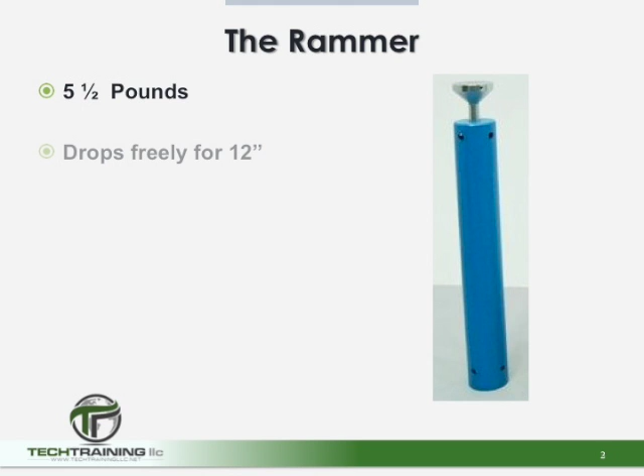Now, whether you're using the standard effort or the modified effort, you're going to need a rammer. In the standard effort D698, the rammer weighs 5.5 pounds. It drops freely for 12 inches, and it has a sleeve to guide the rammer to the soil. The rammer also has 4 vent holes at the top and 4 vent holes at the bottom, 8 vent holes in all.

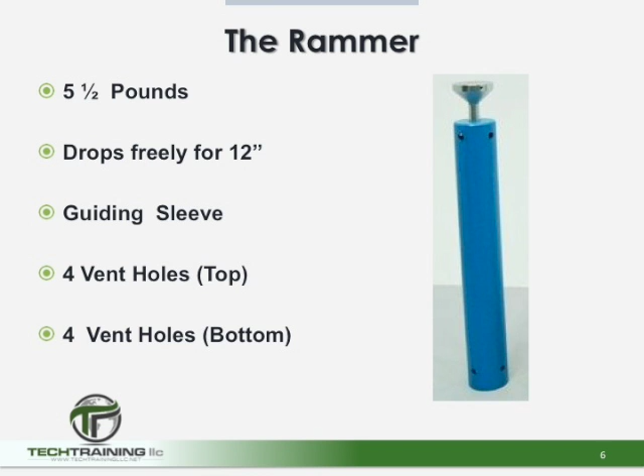Now, when determining the compaction characteristics of soil using the modified effort, we're still going to use a rammer, but here the rammer weighs 10 pounds and it drops freely for 18 inches. However, it does have a guide sleeve and 4 vent holes at the top and 4 vent holes at the bottom.

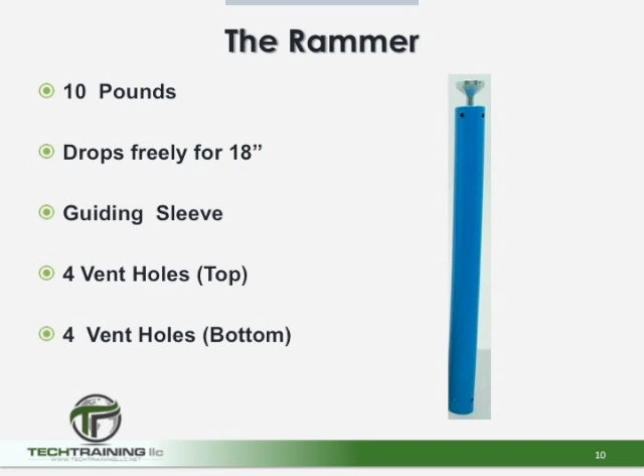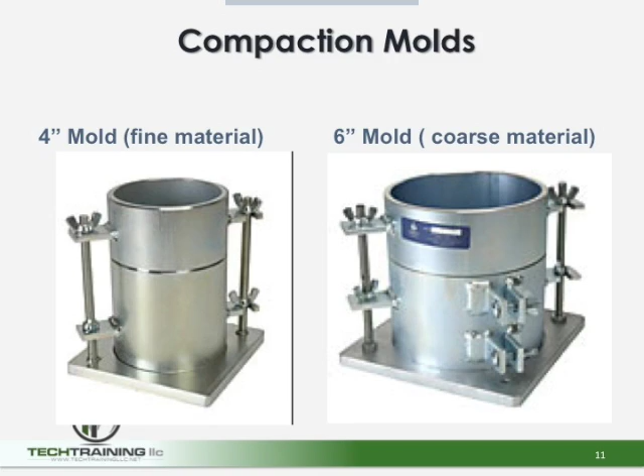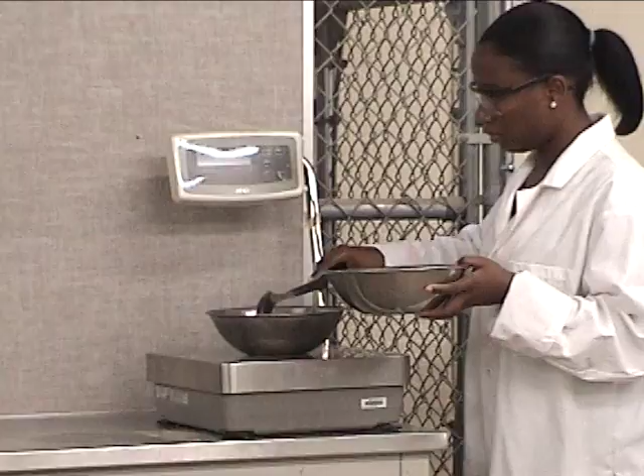We're also going to need a cylindrical mold, a 4-inch mold for finer material and a 6-inch mold for coarser material. We're also going to need an oven, a scale, and mixing tools. Now, there'll probably be other pieces of equipment that we need along the way, but for now, let's head into the lab and begin our tests.

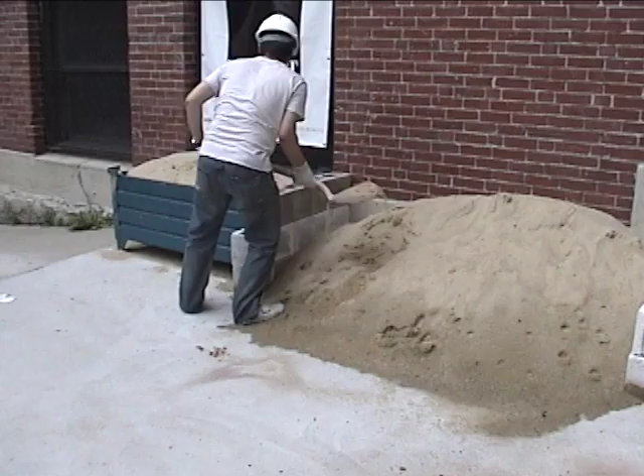In today's lab, we're going to be doing standard test method for compaction using the standard effort. What we'll do is we'll sieve our material through the 3/4 inch sieve to determine the amount of mass that we have on that sieve. We'll also sieve it through the 3/8 inch sieve, and then finally the number 4 sieve.

Now, if you're not familiar with the way sieve sizes work, above the number 4 we have solid numbers, 3/4, 3/8 inches. Once we get into the numbers, which is below the 3/8, we turn into number 4, 8, 16, and so on. All that means is the amount of openings per square inch.

Now, since today's soil has already been sieved through the number 4 sieve, what we're going to do is use the 4-inch mold. And again, this is the standard compaction test. Therefore, we're going to be using the 5.5-pound hammer, which is going to drop 12 inches.

Now, there are 3 different procedures within ASTM D698 that can be used. There's procedure A, which is used with a 4-inch mold. We do this procedure when the weight of the material retained on the number 4 sieve is less than 20% of the total sample weight. We'll use procedure B, which also requires a 4-inch mold, and this procedure is used when the weight of the material retained on the number 4 sieve is greater than 20% of the total sample weight.

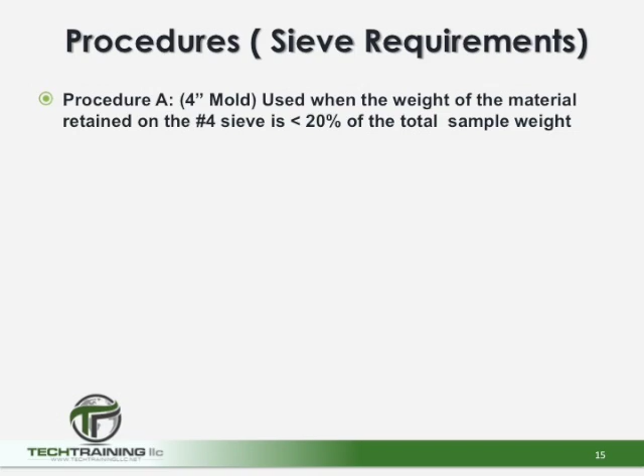So when we do this test, what we're trying to determine is the optimum density of our material. For example, if we were building a sandcastle on the beach, what we do is we add a little bit of moisture to that sand, and the sand begins to pack a little bit better. What's happening actually is that the sand is coming together better. Therefore, if we put sand into our mold here, that sand is going to take up a certain amount of space and it's going to have a certain weight.

So let's just say, for instance, that the first time that we fill up our mold and we compact it, we have 3.25 pounds of dry soil. In other words, what we're determining is we're going to eliminate the moisture from it and say the actual dry density is 3.25 pounds. Now, if we add a little bit of moisture to it, it's going to compact a little bit better.

In other words, more material can go into the mold. So what we're going to do is we're going to determine that dry density, and it's going to increase, let's say, to 3.75 pounds in the mold. Now we're going to add a little bit more moisture, and it's going to go up yet again. And let's just say that it goes up to 4 pounds, again, in the mold.

Okay? Now, all of a sudden, we add a little bit more moisture, and again, think about the sandcastle. What happens is it begins to fall apart. Why is that happening? Because now we're no longer getting optimum compaction, but we're actually replacing the soil with water. So now the weight begins to go down. So as we calculate that dry density, it goes up, up, up, and then eventually we put too much water in it and it goes over the top, and this is what's considered the other side of the optimum.

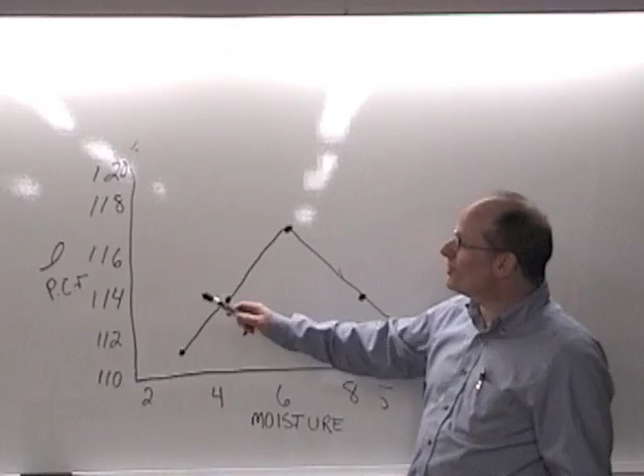So when we graph this, what we're going to do is we're going to graph the optimum density compared to the optimum moisture. And again, if we think about the sandcastle, what we're doing is we start off at, let's say, 3% moisture. And inside of our mold, we put in 110 pounds per cubic foot of material. Now I know that you're thinking, well, the mold is very small. The mold is exactly 1/30th of a cubic foot. So what we do is we take that weight and divide it by 1/30. Therefore, it'll give us the pounds per cubic foot of material in the mold.

So let's say we start off at 3%. We have about 111 pounds per cubic foot of material. We're going to add a little bit of moisture, and that comes up. The moisture goes up along with the density. Then we add a little bit more moisture, and what happens is our density goes up as well as the moisture. And then we're going to add a little bit more moisture, and when we do, we're going to notice that suddenly our dry density begins to drop off.

Once this occurs, we are over the optimum compaction limit. And we want to do it again just to make sure that we definitely have an accurate reading. And once we're beyond the optimum, we can make our determination that this is the optimum. Now, depending upon the application, what the actual control limit is may vary. In some cases, it may be 95% of optimum. In other cases, it may be 93% of optimum, and so on.

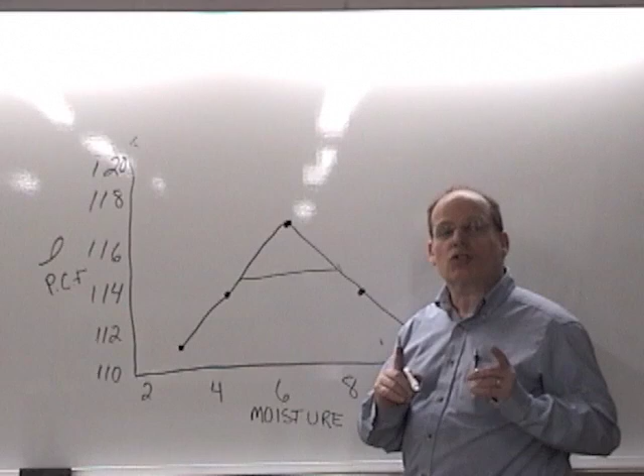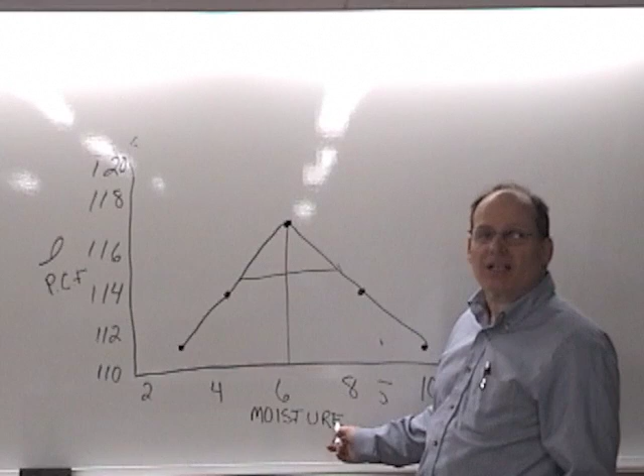But what we're going to try to do today is come up to about 93% of optimum, plus or minus 2% on the moisture. So if our optimum moisture is 6%, plus or minus 2% is going to be 4% to 8%, while we're at 93% of the optimum density. So, without further ado, let's go ahead and give this test a shot.

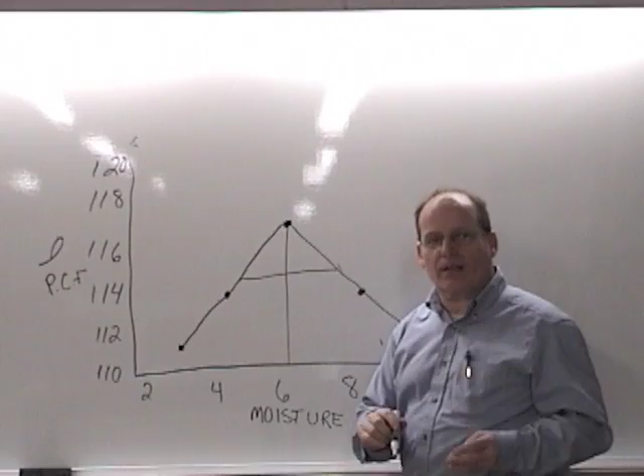What we're doing today is the moist preparation method. This is the preferred method for this particular test. So what we're doing is we're taking our sample, we're going to pass it through a number 4 sieve, because we're using method A, and then we determine the moisture content of our sample. Now, we've prepared 5 samples, starting with 2% moisture, and increasing each sample with 2% moisture from there on up through to the end. So what we're going to do now is, starting with our moisture sample of 2%, we're going to go ahead and do one of the tests.

So the first thing we want to do is we want to weigh our mold without the collar, because when we reweigh this with the material in it, obviously the collar will not be on the mold. To follow along, you may want to record this weight. The empty mold weight is 9.01 pounds. So now we're ready to do the test. So the first thing we want to do is we want to put the collar onto our mold.

And we're going to tighten down the collar. Now we're going to fill the mold in 3 equal layers. Now on the third layer, we want to be just about maybe 1/4 of an inch over the top of the mold into the collar. Okay? Once again, we're going to be doing the standard compaction test. Therefore, we're going to be using the 5.5 pound hammer that has a 12-inch drop. We're going to be doing 3 layers, 25 drops per layer.

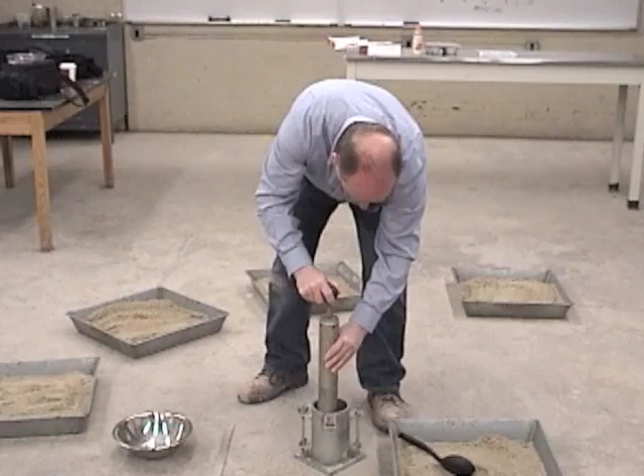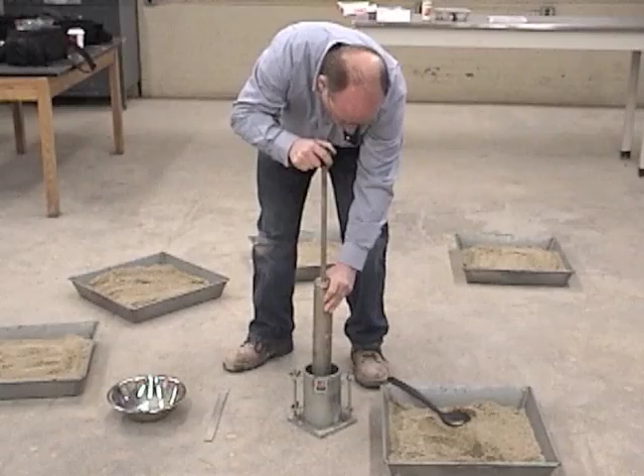So after our 25 drops on the first layer, we want to fill a second layer. And then finally our last layer. And once again, we want to go about 1/4 of an inch into the collar. So here, we're going to come just up above the top of the mold. And once again, we're going to now do 25 drops onto the third layer.

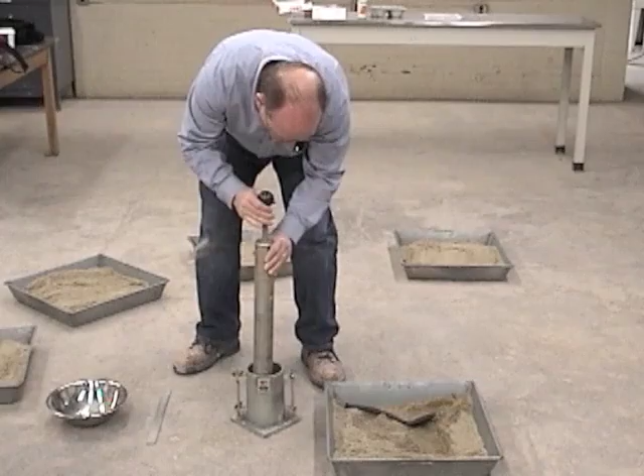So now after the third layer, we're going to go ahead and take the collar off, and we're going to screed off the top of the mold to ensure a nice flat surface. We can now remove the collar from the cylinder, and as you can see here, we're about 1/4 of an inch above the top of the mold. So we want to go ahead and scrape off the excess, and then we're going to clean the mold before we weigh it.

So now we're going to go ahead and weigh both the mold and the compacted soil. Now you may remember that the weight of the empty mold was 9.01 pounds. The weight of the moist soil and the mold is 12.67 pounds. So here we simply want to deduct the weight of the mold, and this tells us that there is 3.66 pounds of moist material in the mold.

Now that we have the weight of both the mold and the moist soil in the mold, we need to get an accurate moisture content on that material. Therefore, the first thing we have to do is weigh an empty bowl. This bowl will be used to put our moist material in and then place in the oven. The bowl weighs 380 grams.

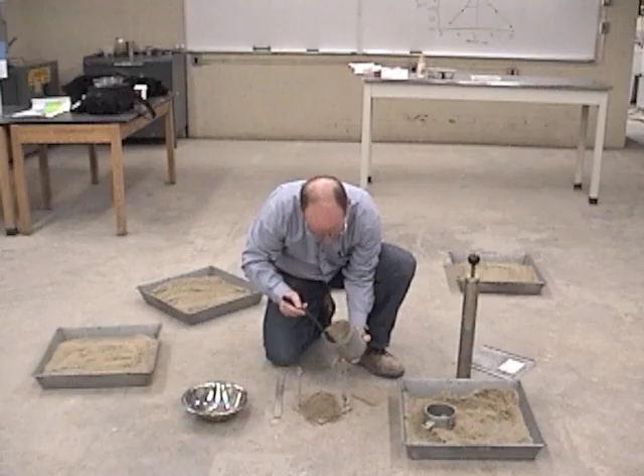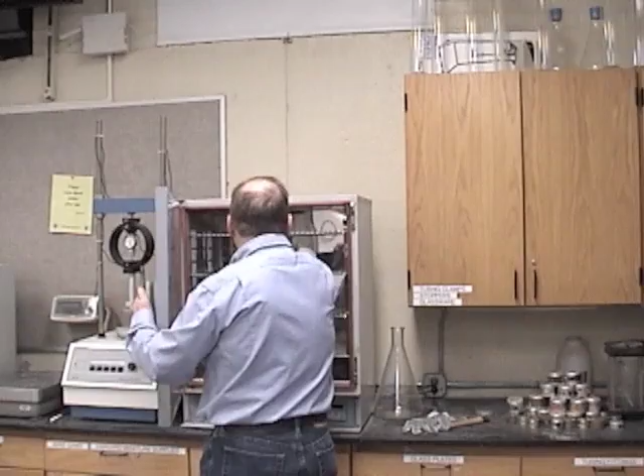Now that we've gotten our representative sample from the mold, we want to go ahead and weigh both the bowl and the sample. In this case, that weight is 880 grams. You may recall that the bowl itself weighed 380 grams, meaning that the moist soil is 500 grams. We now want to dry the sample to a constant mass and be sure to record this weight. For our example, let's assume that the weight of the dry sample and the bowl was 870 grams, meaning that the dry soil is 490 grams.

Now the calculation for moisture content is the moist soil minus the dry soil divided by the moist soil multiplied by 100. Or in our case, 500 grams minus 490 grams divided by 500 grams times 100 tells us that our sample has 2% total moisture content.

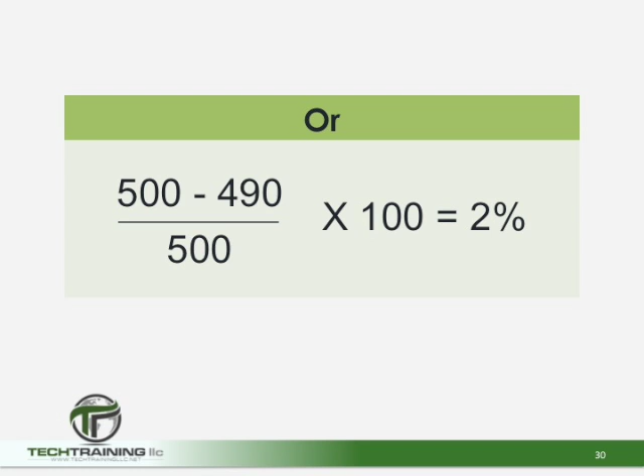We now have all the information necessary to calculate our dry density. We have the volume of the mold, which is 1/30th of a cubic foot, or 0.033 cubic feet. We have the weight of the mold, which is 9.01 pounds. We have the weight of the moist soil compacted, that's 3.66 pounds. And we have the moisture content of our soil at 2%.

To calculate our dry density, we must first calculate the unit weight of the material. We do this by taking the moist weight of the sample and dividing it by the volume of the mold. Here, our moist sample is 3.66 pounds. We want to divide that by the volume of the mold, which was 0.033 cubic feet, which gives us a unit weight of 110.9 pounds per cubic foot.

Now, to get the dry density, all we do is remove the moisture. We do this by taking the 110.9 pounds per cubic foot and dividing it by 1 plus the moisture content, which was 2%, giving us a dry density of 108.7 pounds per cubic foot.

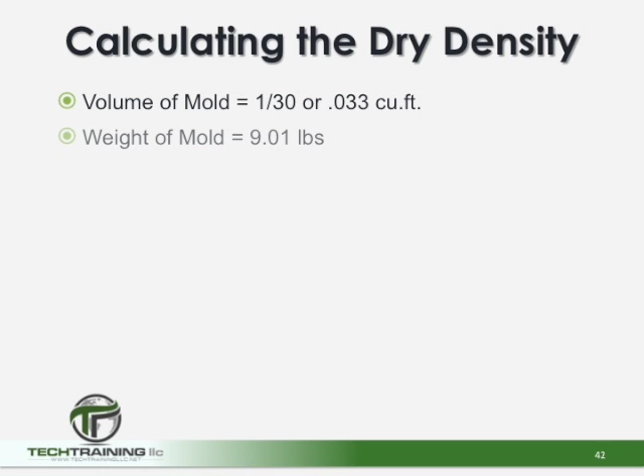And once again, we have all of the information necessary to calculate our dry density. The volume of the mold is 1/30th of a cubic foot. The weight of the mold is 9.01 pounds. The weight of the moist compacted soil is 3.98 pounds. And you may recall at the beginning of the presentation, we said we're going to carefully add 3% moisture to each test. So 2% from the first test plus 3% is going to be 5% moisture in this sample.

And now we can calculate our unit weight, which is going to be 3.98 pounds divided by 0.033 cubic feet, gives us a unit weight of 120.6 pounds per cubic foot. And our dry density is going to be 120.6 pounds per cubic foot divided by 1 plus the moisture content of 5% gives us a dry density of 114.9 pounds per cubic foot. Now we have the second data point in our chart, so let's go ahead with our third run.

And again, as expected, the mold weight does not change, but also as expected, the mold with the moist soil does increase. Again, because we have more moisture, therefore our soil is coming together better, it is compacting better, and more soil gets in the mold. So now the mold plus the soil weight is 13.27 pounds. And this means that just the compacted soil is 4.26 pounds.

And now again, we have all of the data points that we need to calculate our dry density. And don't forget, our moisture content is now 8%. We've increased it by 3% once again. So if we have 4.26 pounds of soil, we're going to divide that by the volume. Gives us a unit weight of 129.1 pounds per cubic foot. And once again, to calculate the dry density, 129.1 divided by 1.08 gives us a dry density of 119.5 pounds per cubic foot. So let's go ahead and plot that data point onto our chart before moving on to run number 4.

So run number 4 is complete, and here is our data. Again, the volume of the mold, 1/30th of a cubic foot. Weight of the mold is 9.01 pounds, but here the weight of the mold and the moist compacted soil is 13.22 pounds, and we have a moisture content now of 11%. So the weight of the soil in the mold is 4.21 pounds, which gives us a unit weight of 127.6 pounds per cubic foot.

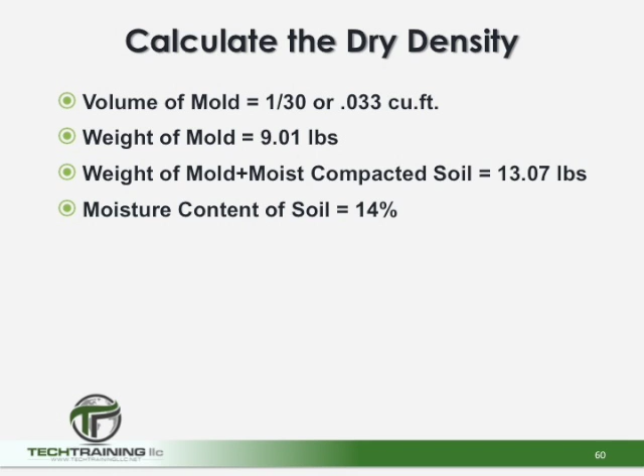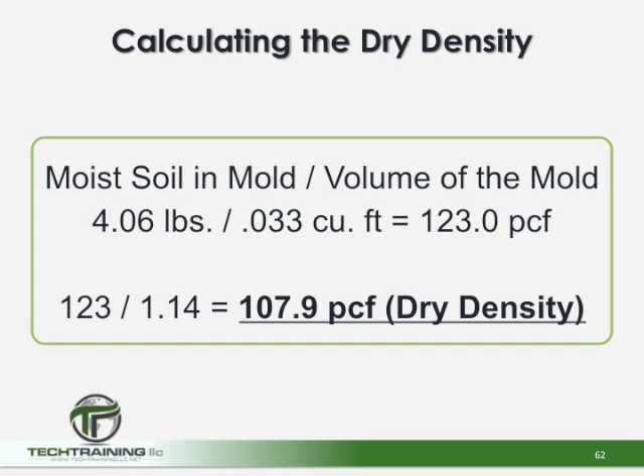And for run number 5, again, volume, 1/30th of a cubic foot, weight of the mold, 9.01 pounds. The weight of the mold and moist soil is now at 13.07 pounds, and our moisture content is 14%. And from this, we see that our moist soil in the mold is 4.06 pounds, which gives us a unit weight of 123 pounds per cubic foot, and that gives us a dry density of 107.9 pounds per cubic foot, which is obviously at this point well beyond the optimum.

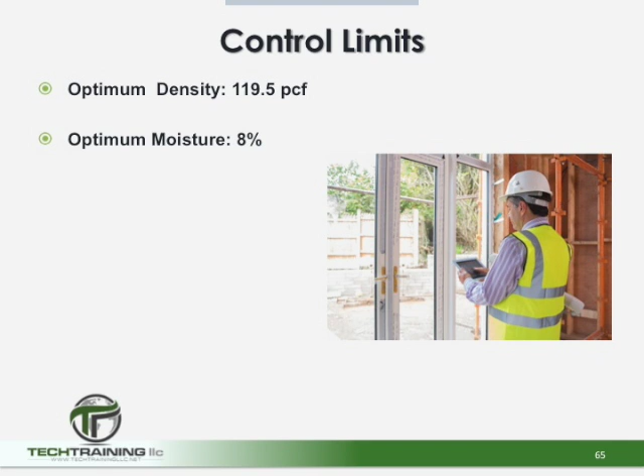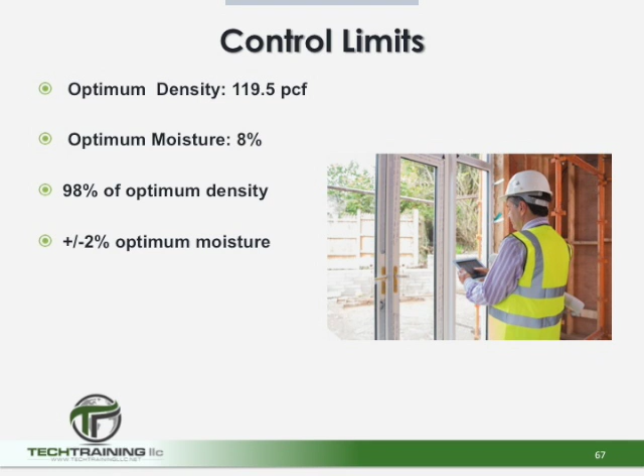So now let's go ahead and take a look at our control limits. Here we know that we have an optimum dry density of 119.5 pounds per cubic foot and an optimum moisture of 8%. Let's assume that our control limits are 98% of the optimum density at plus or minus 2% the optimum moisture. So now, when we compact in the field, we want our soil to be at least 117.1 pounds per cubic foot and have a moisture content of 6 to 10%.